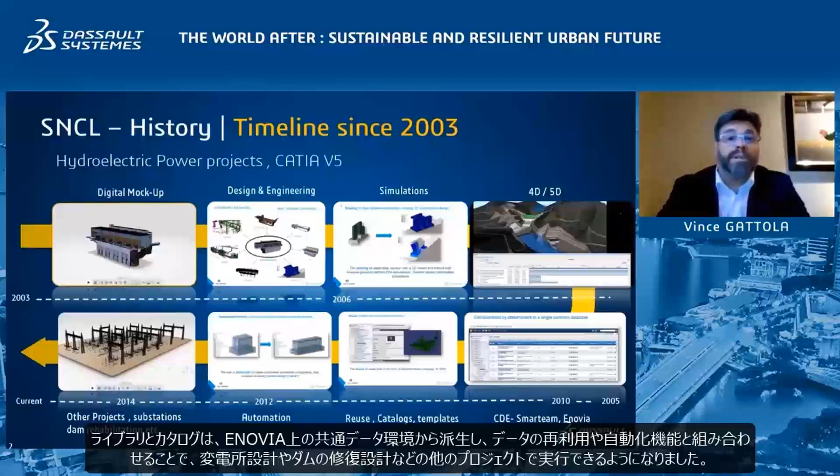The asset data contained within the digital twin was shared for 6D FEA analysis, such as seismic and deformation. As well, construction optimization was achieved for 4D, 5D simulations. Moving forward, having important asset data now available, SNC-Lavalin began the transition to a data-centric approach and adopted Dassault Systèmes SmarTeam and eventually migrated to ENOVIA 2012X. Libraries and catalogs were now derived from the ENOVIA Common Data Environment. Combined with automation, reusability of data was now possible to perform on other projects such as substation design and dam rehabilitation designs.

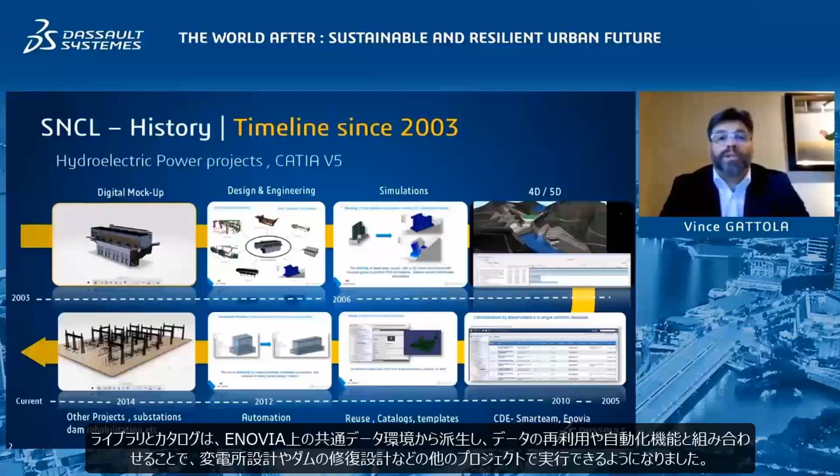In 2017, SNC-Lavalin infrastructure major projects began a value transformation journey via a value assessment to better understand the current state of projects, processes, and also look at how they collaborated on their projects. Based on an internal assessment, they found out that the teams worked in silos. Processes were linear, segregated, and not really integrated together. Risks were individually managed. Multiple platforms existed. Old technology still existed and mostly 2D. Agreements on the projects required unilateral efforts, really no sharing.

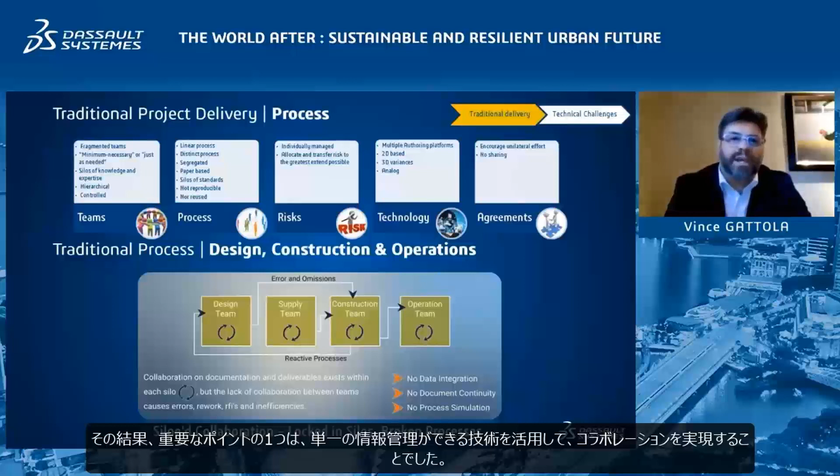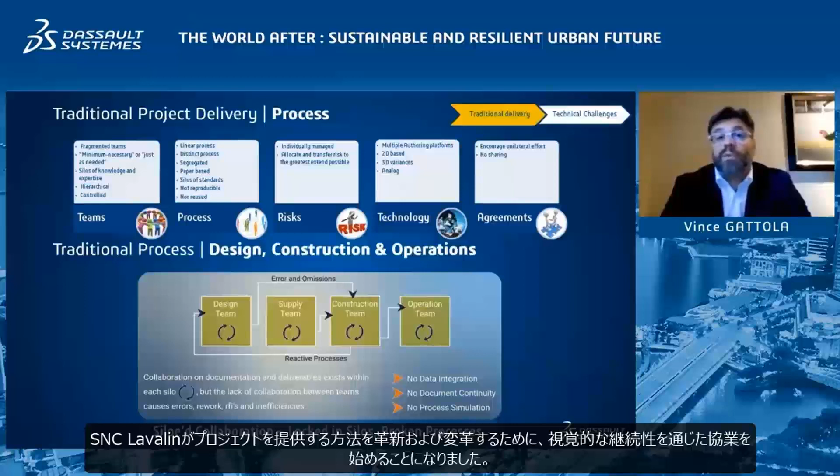As a result, one of the key takeaways was to bring a level of collaboration, leverage technology such as a single source of information. This would initiate collaboration through digital continuity in order to innovate and transform the way SNC-Lavalin would deliver projects. During the assessment, some key challenges were outlined, really emphasized by BIM tendencies back then. BIM presented siloed practices across the projects. The lack of collaboration between stakeholders on a project was evident. Models were exported and imported into disconnected systems. Data silos therefore caused errors, version control problems, and required rework.

There was no seamless flow of information across the project lifecycle, no integrated system to leverage the BIM data that was being created on the projects. So interoperability of data and standardization was non-existent. Therefore, RFIs, that's requests for information, persisted from the construction site, along with change management issues and other issues as well. If we take a look at the unstructured platform image on the right, you'll notice a slew of platforms causing these data silos and erroneous data.

The question now was, how can we improve? How can we eliminate some of the platforms? And this became a challenging question internally at SNC-Lavalin because it was the way they worked. It was not to be touched. So how can we proceed to make it better? Some of the platforms were really not BIM compliant. Trying to interoperate with formats was very difficult, with spatial distances, format import issues, as well as document management. And this created duplicated data exported to file structures with really no version control.

So, having assessed the current challenges, we needed to adopt a vision and a strategy for transformation to occur and innovation to deliver the project. BLM, Building Lifecycle Management, was adopted. It combined both BIM and PLM practices as an inspiration. SNC-Lavalin needed to transition towards integrated project collaboration. The people, the process, and the technology were also assessed. As a result, the integrated project delivery approach was adopted.

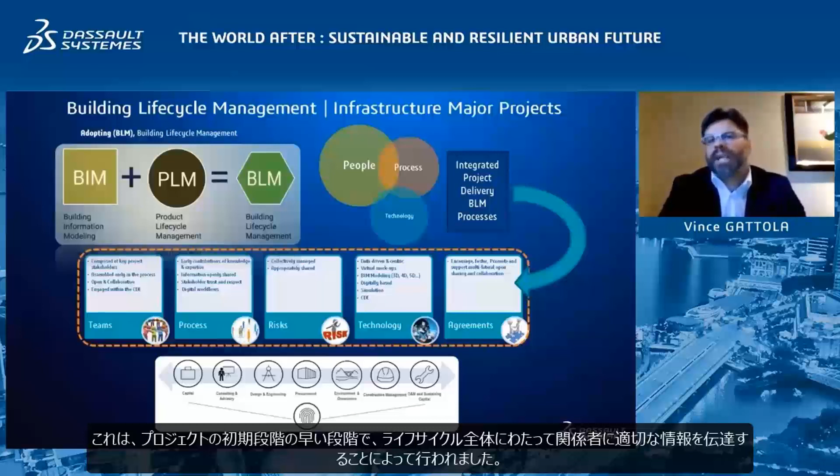its whole life cycle. So as in any value engagement, a value transformation roadmap was introduced, as you can see here, top right corner. One that would foster and extend collaboration by achieving different levels or phases of implementation. First, we wanted to use the technology and the digital processes presented by BIM and the 3D Experience platform to have a better design, reinvest from 2D to 3D.

We wanted to use a single integrated digital platform to store, share, and reuse the same data, the same true information across the whole life cycle of a project, implement and configure as required within the common data environment, and this allowed us to improve productivity, reduce the rework, and iterations.

Thirdly, through design automation, we wanted to build accessible benchmarks, reusable data from our previous digitized projects. This would allow us to go in more detail in a short period of time, therefore reducing the risk and the cost, optimizing the schedule, and giving us an edge on competition.

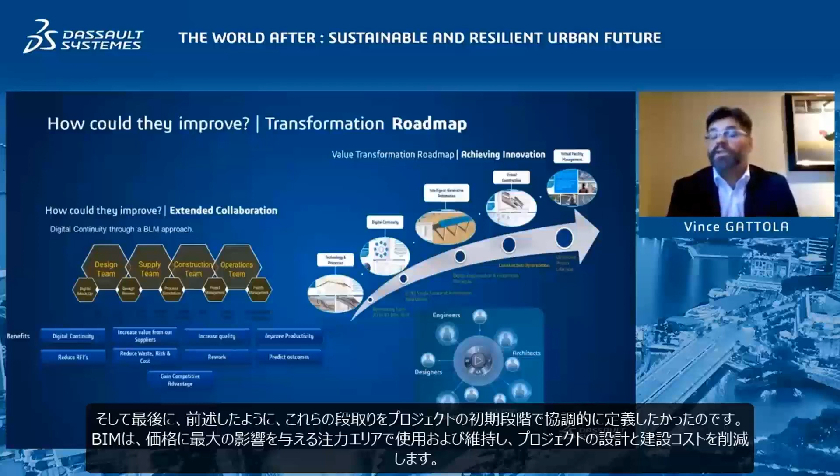And finally, as I said, we wanted to define collaboratively the early phases of a project, the BIM uses, and maintain focus areas that would have the biggest impact on our prices, reduce the design and the construction costs on projects, such as construction optimization.

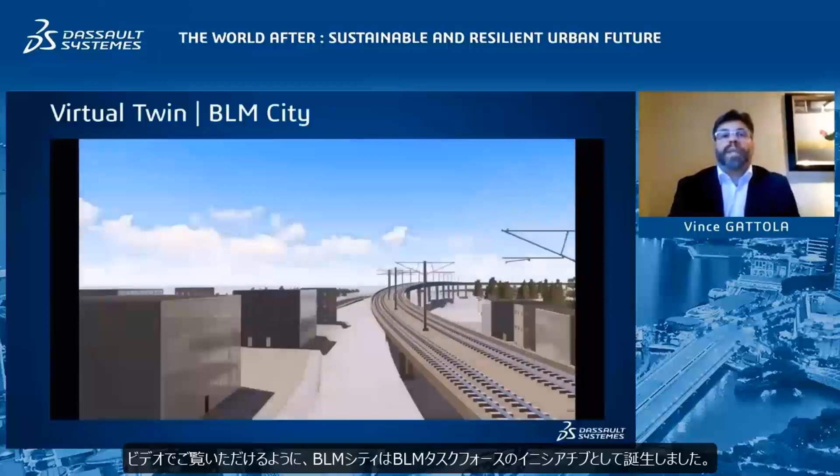The BLM City was born as an initiative of the BLM Task Force, as you can see here in the video. It was my team, the team selected to head the digital transformation. The BLM City Virtual Twin was a means to educate, learn, inspire stakeholders, and demonstrate progression in our developments.

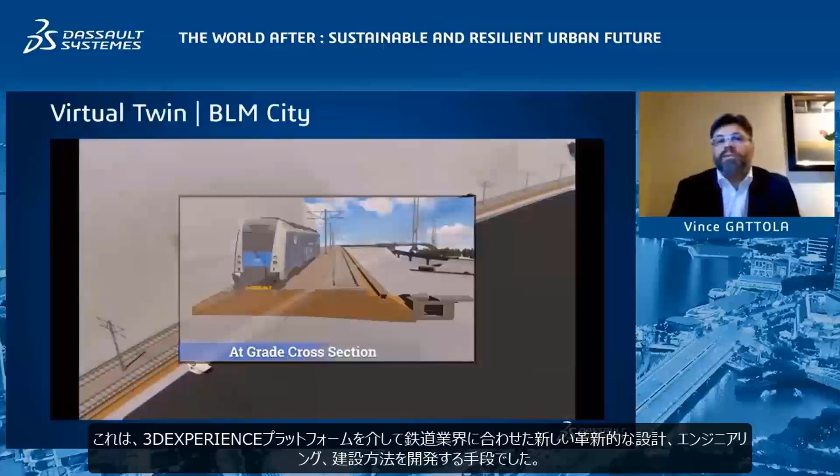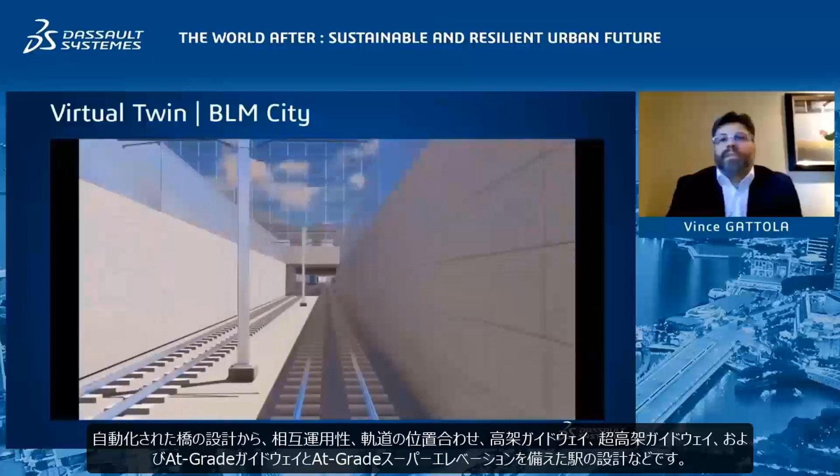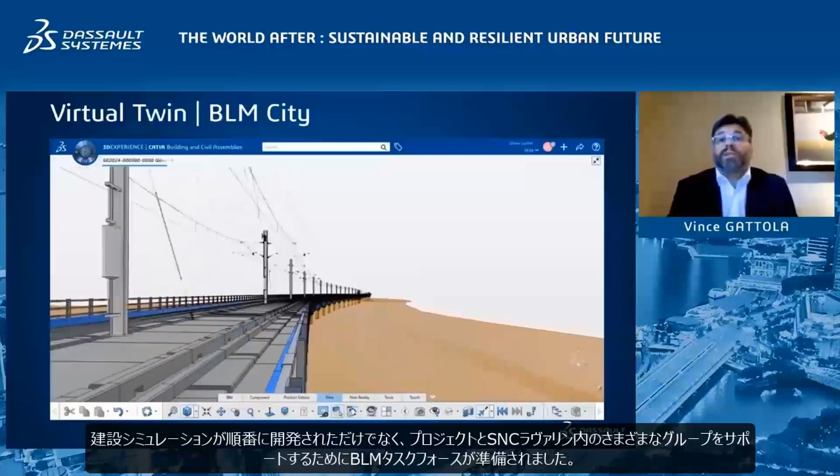It was a means to develop new innovative designs, engineering, and construction methods really tailored for the railway industry via the 3D Experience platform. From automated bridge designs, station designs with interoperability, track alignment, elevated guideways, super elevated guideways, at-grade guideways, and at-grade super elevation, as well as construction simulations was developed. In turn, it prepared the BIM task force to support projects and the different groups within SNC-Lavalin.

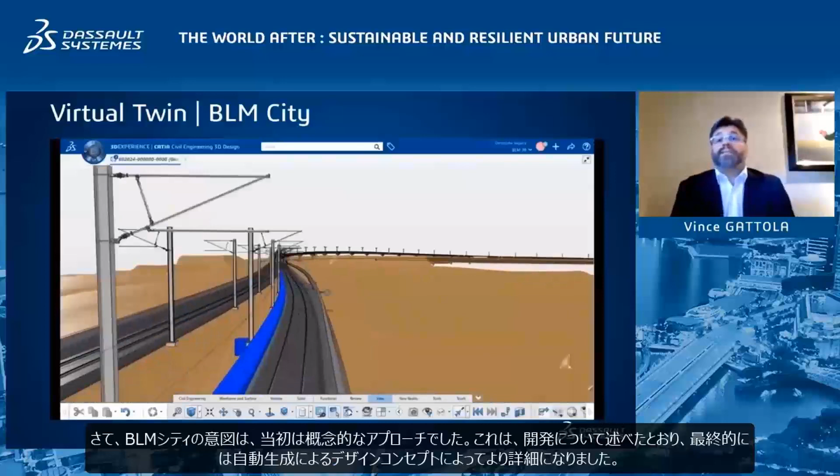Now, the intent of the BLM City was to be first a conceptual approach, as I mentioned, for development, and eventually, as we progressed, it became more detailed using an automated generative design concept.

I wish I could show you more here, but the time is constrained.

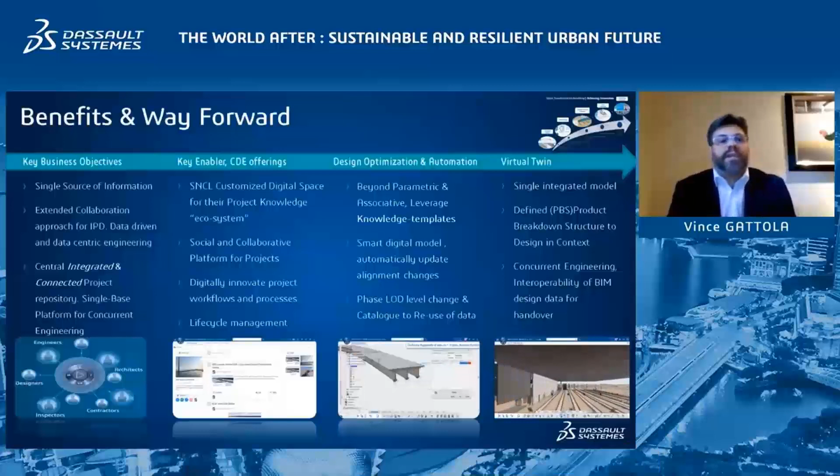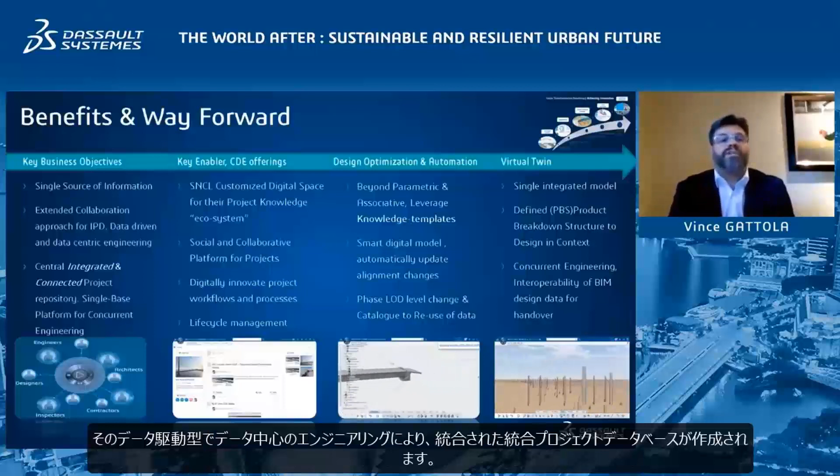With the transformation roadmap outlined, some of the key transformation objectives were set. Key business objectives such as single source of information. We wanted to achieve an extended collaboration approach for IPD, that data-driven and data-centric engineering. So it would create a central, integrated, connected project repository.

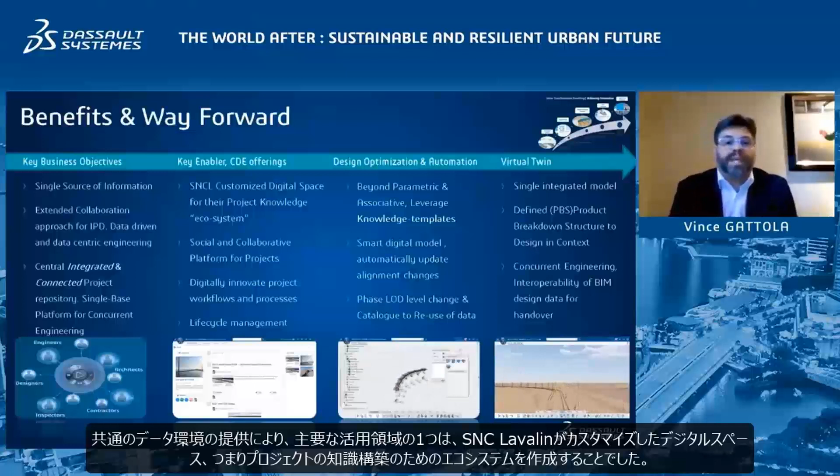By the common data environment offerings, one of the key enablers would be to create that SNC-Lavalin customized digital space, that ecosystem for projects knowledge. It would create a social and collaborative platform on projects.

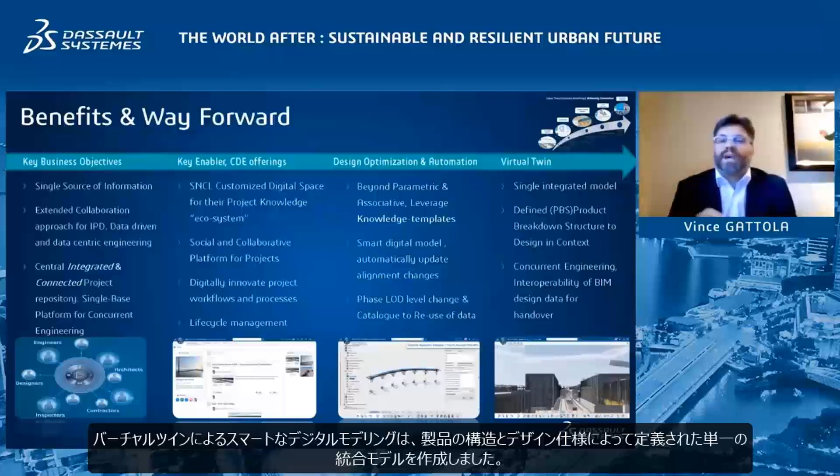For design optimization and automation, well, it was beyond parametric associativity. It was to leverage those knowledge templates and gain information from those engineering rules. Smart digital modeling. Through virtual twin, it was to create that single integrated model defined by a product breakdown structure and designing in context. Now let's look at this in detail.

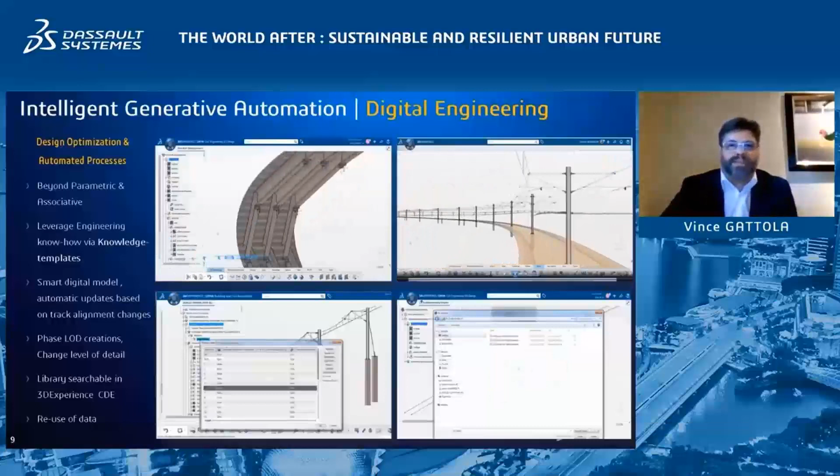So for intelligent generative automation, which we call digital engineering, it was beyond parametric design. It was really capturing the engineering know-how, embedding it in the knowledge templates. Components-based design to develop smart digital models, and this combined with a change of level of detail from 200 to 400

if wanted, if required. As an example, the bridge elements top left video was designed not only with component-based design and knowledge templates, but as well referencing a track alignment that was coming to us from AutoCAD Civil 3D. Yes, in fact, through a LandXML converter that we developed with Dassault Systèmes, if any changes were to occur to

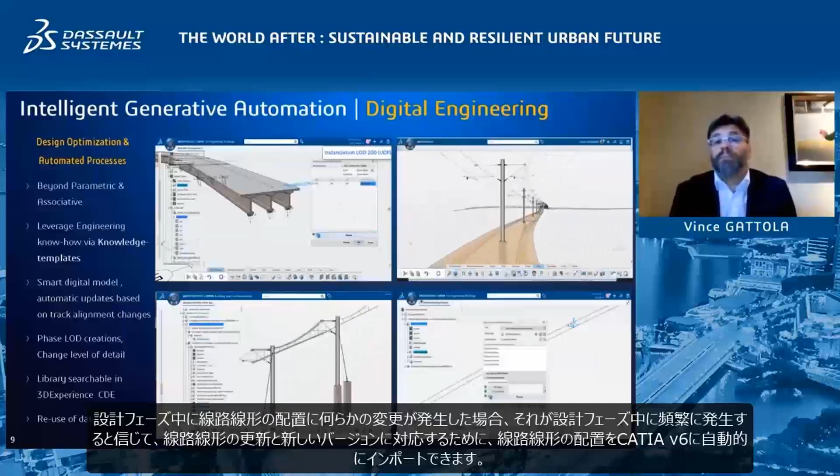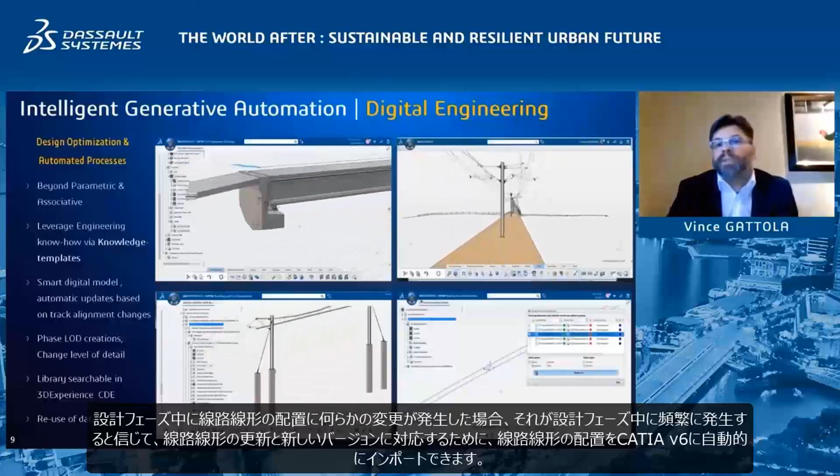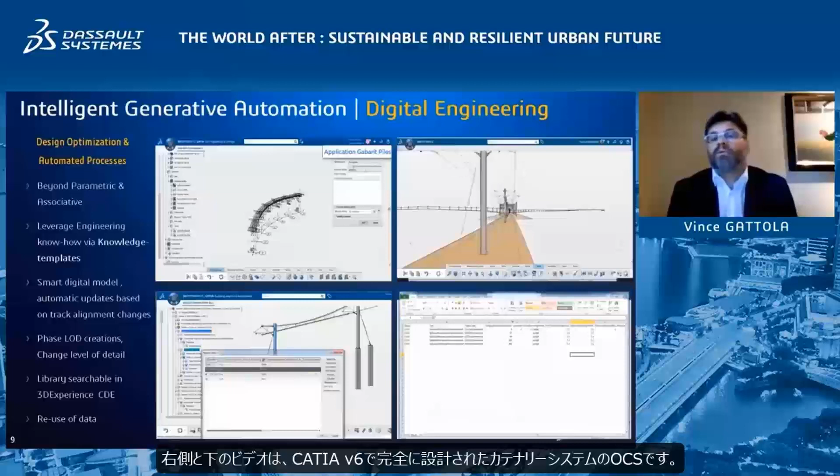the track alignment during design phases, and trust me, this would occur often during the design phases, we're able to automatically import the track alignment into CATIA V6 to accommodate an update and the new version of track. This was completely revolutionary and changed the way we work today. On the right and below videos were the OCS overhead catenary systems design completely in CATIA V6.

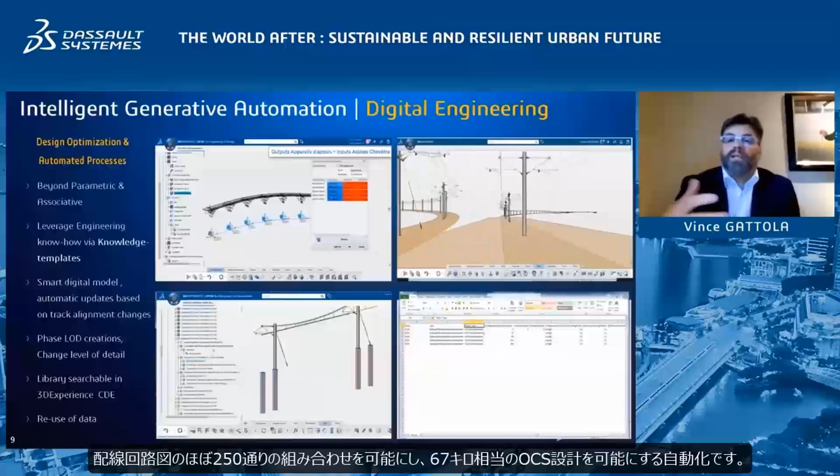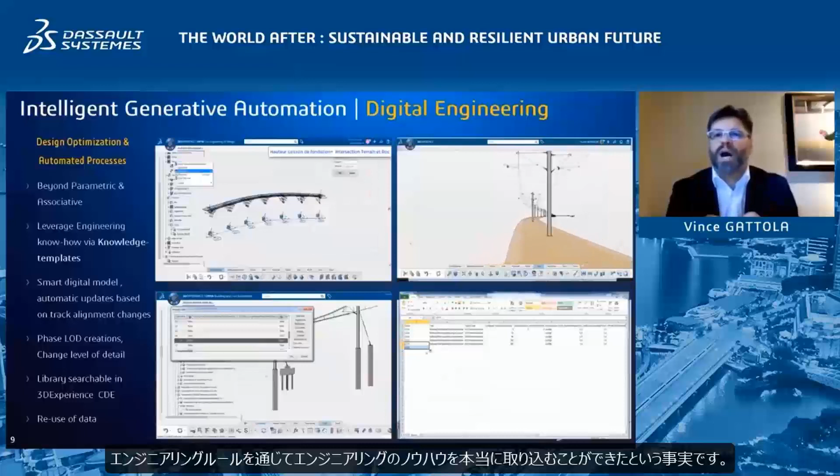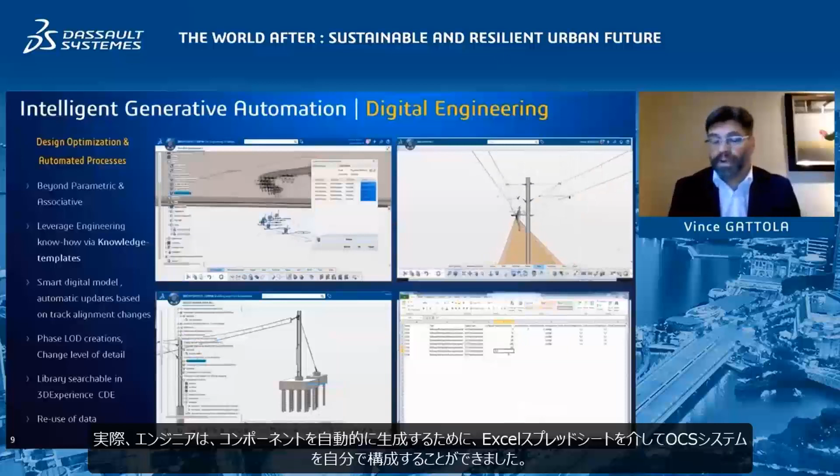Automation that enabled almost 250 different combinations of wiring schematics, as well as 67 kilometers worth of OCS designs. What I like about this development is not only the fact that we disrupted the industry in creating all this in CATIA V6 and automated it, but the fact that we were able to really capture engineering know-how through engineering rules. This therefore allowed a complete validation of the OCS designs in order to reuse them on the different projects. In fact, the engineer was able to configure the OCS system himself via an Excel spreadsheet, as you can see at the bottom, that would instantiate the components automatically.

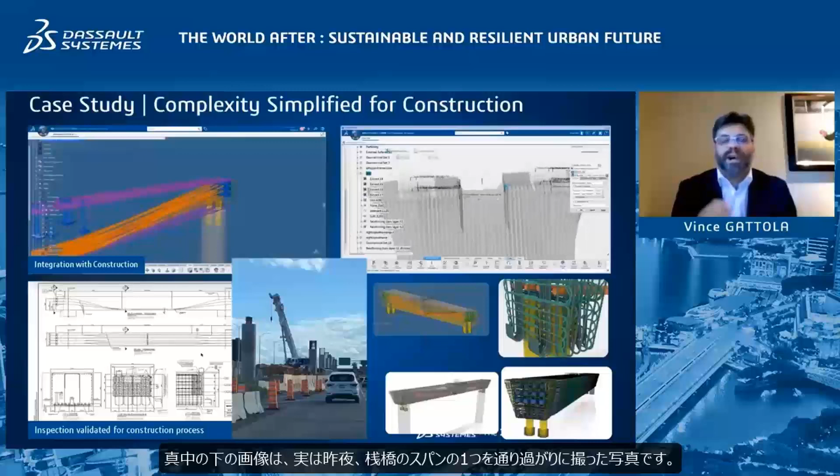Now, the image below center is actually a picture I took last night passing by one of the spans with piers already poured. The second item of the transformation roadmap was implementing a common data environment to serve projects. Some examples that you'll see of different configurations were achieved for project controls. A means to standardize project requirements so as to replicate from one project to another. It allowed us to save almost 75% of startup times.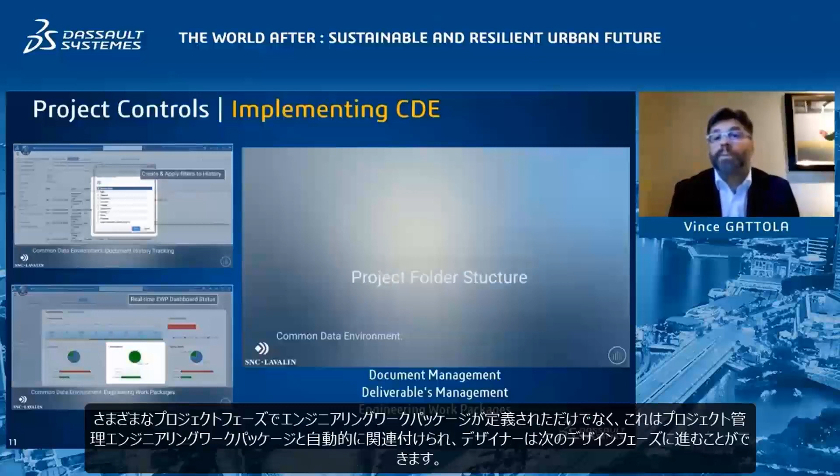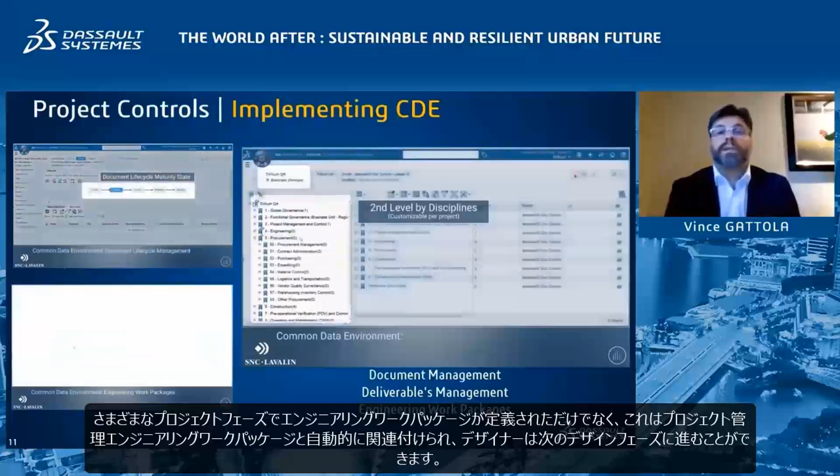Document management, document lifecycle management, configurations, for instance, that automatically renamed non-CAD documents to the standardized SNC-Lavalin naming structure that we created. And of course, creating a lifecycle of versioning of all these components. You're seeing this right now in the top left corner. As well, engineering work packages were defined for different project phases. This would automatically associate project management engineering work packages to designers so that they can follow into the next design phases.

What was achieved for the virtual twin? First, we were able to create a usable virtual twin, that's important, that contained the product breakdown structure derived from a project work breakdown structure. That's key, and not only for clash detection. It allowed disciplines to foster their designs and design in context, what I call concurrent engineering.

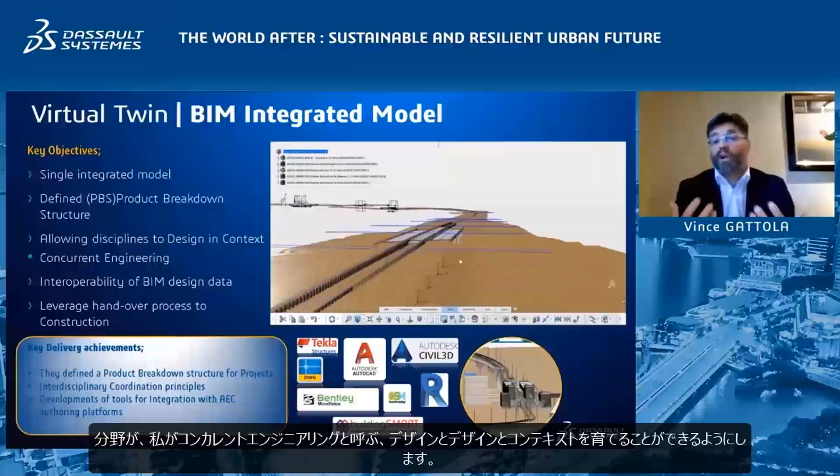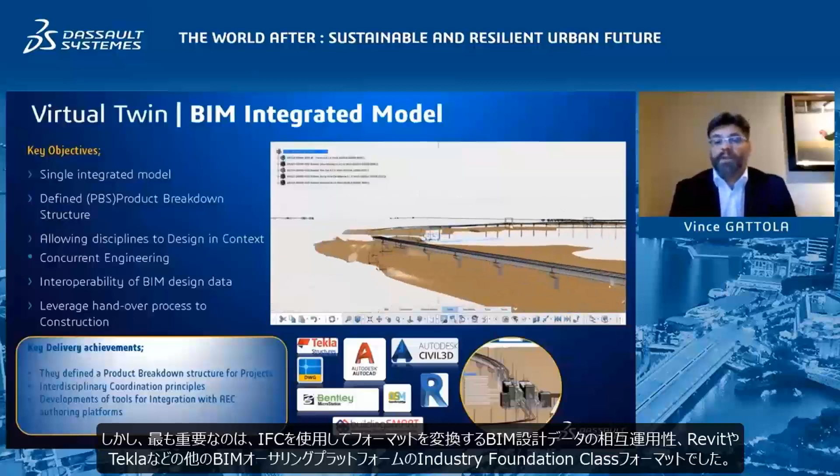But most importantly was interoperability of the BIM design data, converting formats by using IFC, Industry Foundation Class formats, from other BIM authoring platforms, such as Revit and Tekla. For example, with Revit, we're able to bring in the Revit geometry with the IFC data model sets. With Tekla as well, we're able to bring them in. So that was key to creating that BIM integrated model.

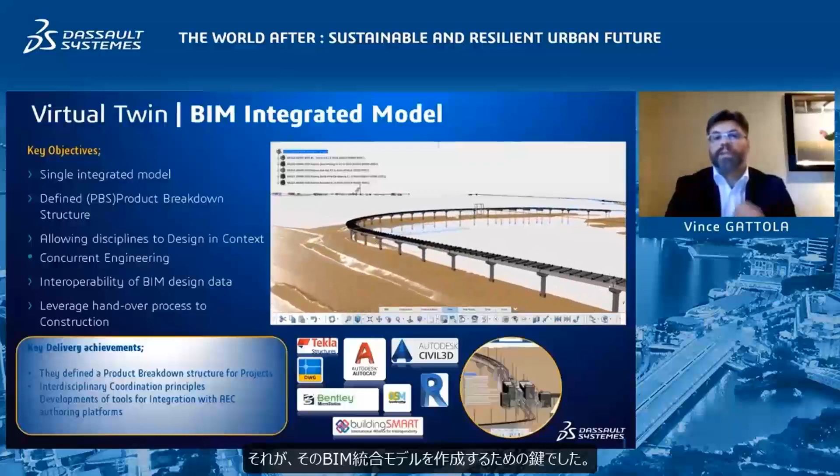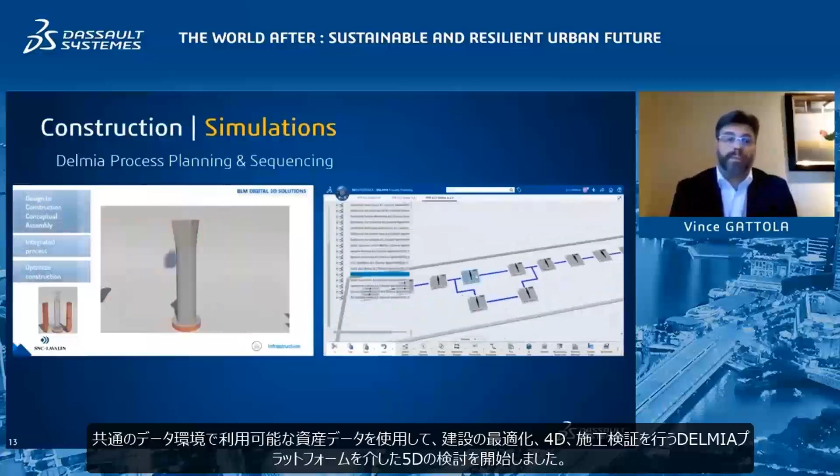With asset data available in the common data environment, we began looking at construction optimization, your 4D, your 5D, via the Delmia platform. The example on the right demonstrates a data structure that is broken down based on construction practices and schedules. Process planning and sequencing via Delmia allowed us to plan, for example, the concrete pours with the time factor available and the sequences as well.

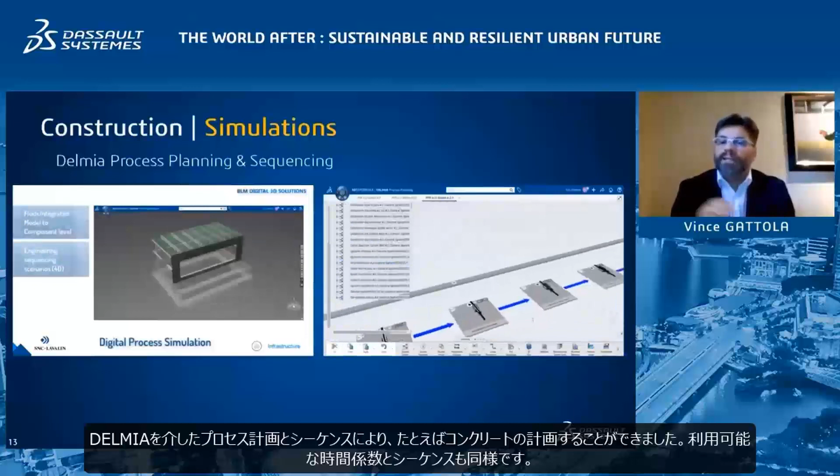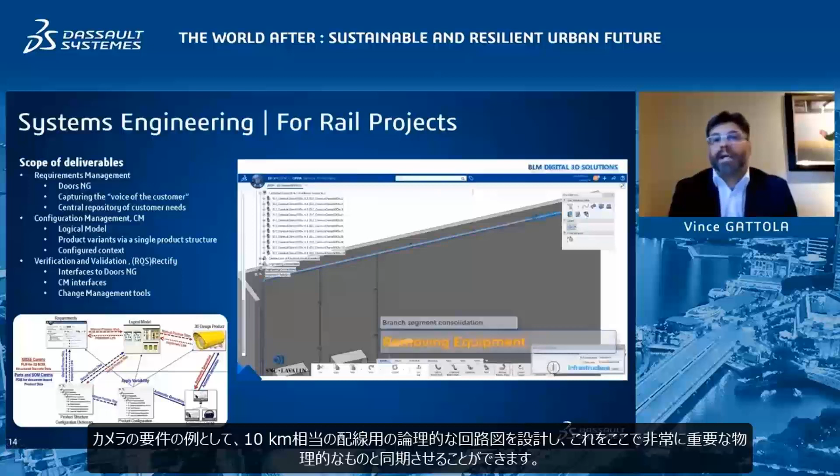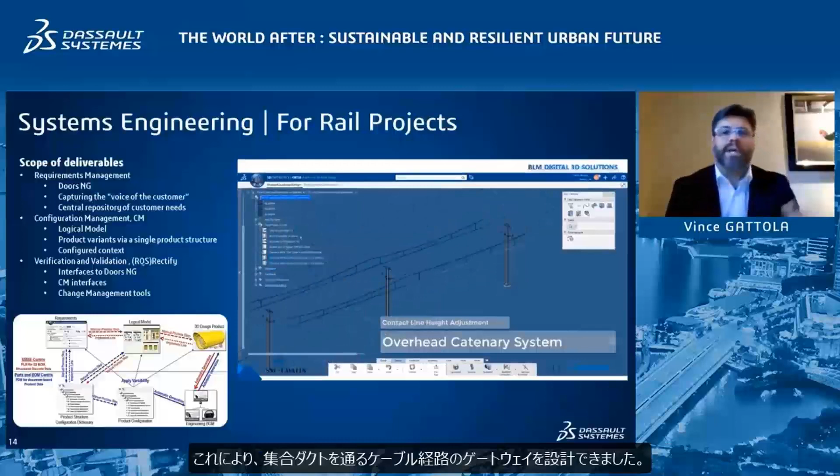Another key implementation was for systems engineering. With the 3D Experience platform, we began to look at requirements, the functional, the logical, and the physical pertaining to systems control on railway designs. As an example, for requirements of cameras, we were able to design the logical schematics for 10 kilometers worth of wiring and synchronization, along with the physical, very important here. One of the key advantages was for duct bank design, following a track alignment. This was made possible because of the power of CATIA to actually follow the terrain conditions and the track alignment at the same time. This allowed us to design the cableways through the duct bank.

Finally, interoperability via connectors and converters. We were able to work with Revit by converting the stations and adding them to the virtual twin via the IFC data model sets. As well, working with Civil 3D, as I said, via LandXML, we could integrate the track alignment and automatically update it. Once in the 3D Experience, this allowed us to expand our work via ENOVIA, CATIA, Delmia, and finally, Simulia.